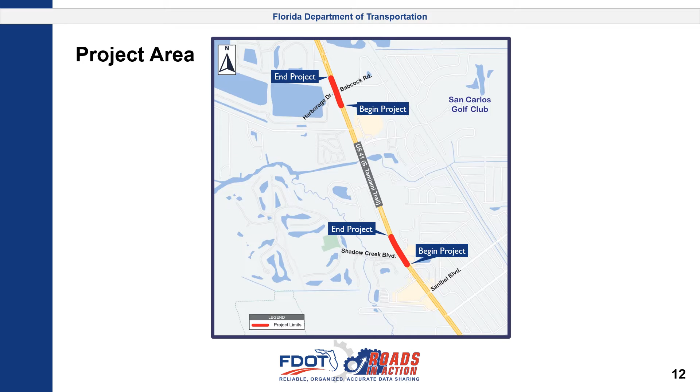Slide 13. The project is intended to increase safety along US 41 by managing access at the intersections of US 41 at Shadow Creek Boulevard and US 41 at Harborage Drive / Babcock Road. Access management is being applied by converting the existing full median access to 2-way directional median access.

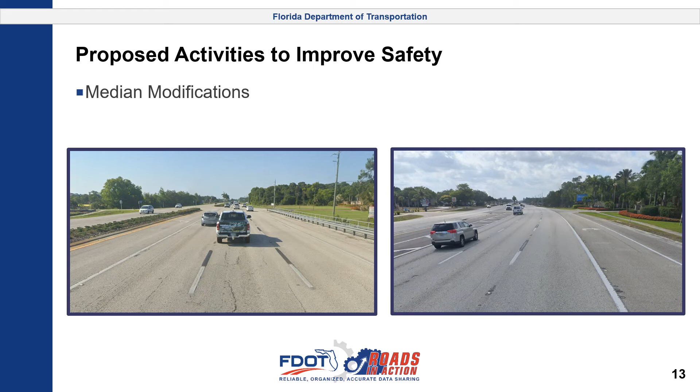Slide 14. One of the most important responsibilities of the Florida Department of Transportation is to ensure that the design of each state road properly balances access and mobility. Increased access supports the mobility of people and goods within a corridor. However, as the number of access opportunities increases, so do the potential interruptions to traffic flow.

Each interruption or conflict point presents a safety concern. Adjusting roadway configurations to maintain property access while limiting the number of conflict points is known as access management. The purpose of access management is to provide access in a manner that preserves the safety and efficiency of the transportation system.

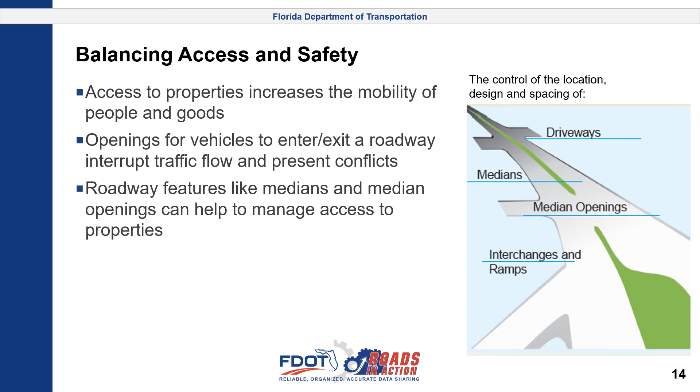Slide 15. Conflict points are areas where vehicle paths legally cross within an intersection. For example, when one vehicle turns right to enter a roadway, it must merge into the path of vehicles that were already heading straight on that roadway. This requires vehicles traveling in different directions and at different speeds to share the same space. Crashes are most likely to occur at these conflict points.

This graphic illustrates how the number of conflict points changes based upon converting a full median access to a 2-way directional median access. The 2-way directional median access reduces the number of conflict points by reducing the through and left turn movements from side streets. These side street movements are redirected to turn right onto the main roadway, followed by a U-turn at an adjacent median opening. This is called a restricted crossing U-turn.

With a restricted crossing U-turn, drivers stopped at the side street waiting to cross or turn left no longer must navigate a complex intersection with two directions of traffic, often traveling at high speeds. The restricted crossing U-turn results in a 54% reduction in injury and fatal crashes.

Slide 16. This project proposes converting full median openings at two locations to two-way directional median openings. A full median opening allows left turns for vehicles from each intersection approach along the main roadway and side streets. Turning vehicles would maneuver in a shared space with many conflict points within the median opening.

A two-way directional median opening is configured so that only vehicles traveling along the main roadway can access it to make a turn. Left turn and through movements from side streets are removed. On a north-south main roadway, there would be one directional opening for northbound left and U-turning traffic, and a separate directional opening for southbound left and U-turning traffic.

This configuration has fewer conflict points and provides improved visibility by managing the placement of vehicles within the median.

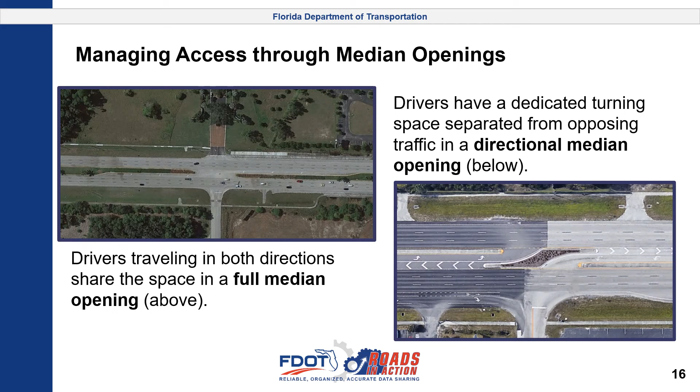Slide 17. This table compares the number of fatal/incapacitating and total crashes at Shadow Creek Boulevard and Harborage Drive/Babcock Road from the years 2015 to the present under current and proposed conditions. By eliminating left turn movements onto US 41, a 28% reduction in crashes at Shadow Creek Boulevard and a 25% reduction in crashes at Harborage Drive/Babcock Road is expected.

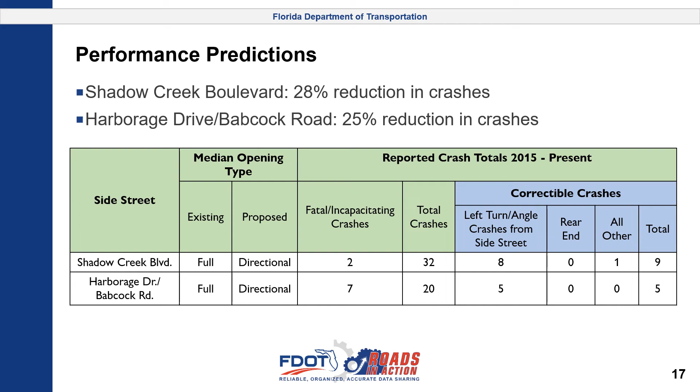Slide 18. To reduce crashes and increase safety, the full median opening on US 41 at Shadow Creek Boulevard will become a two-way directional median opening. This modification is expected to reduce the number of crashes at the intersection by 28%.

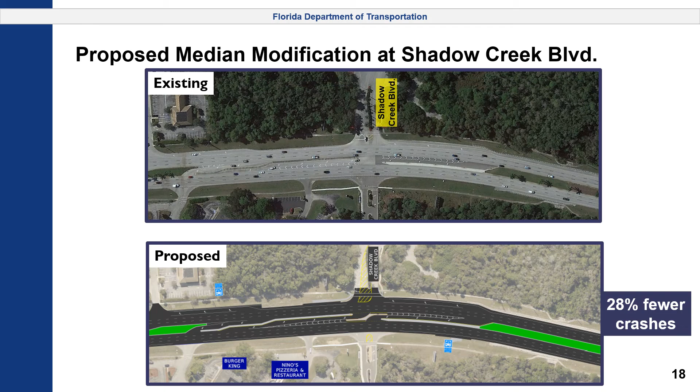Slide 19. Drivers accessing US 41 from Shadow Creek Boulevard will no longer have the option to turn left to enter northbound US 41 or travel through onto Trifecta Lane. Instead, they will turn right onto southbound US 41 and proceed to the directional median opening at the San Carlos Plaza, which is approximately 550 feet from the Shadow Creek Boulevard intersection. This maneuver is expected to add approximately 39 seconds of travel time for some commuters wishing to head northbound.

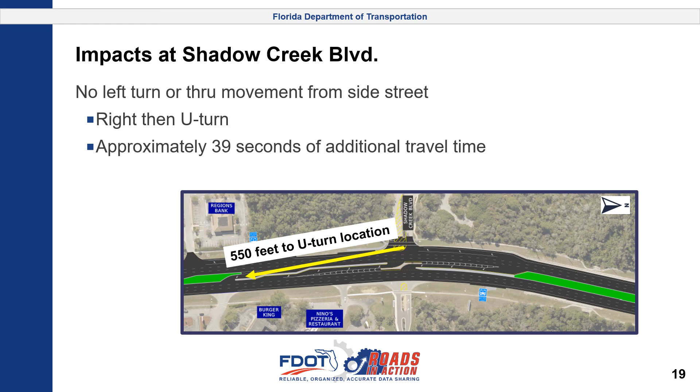Slide 20. To reduce crashes and increase safety, the full median opening on US 41 at Harborage Drive/Babcock Road will become a two-way directional median opening. This modification is expected to reduce the number of crashes at the intersection by 25%.

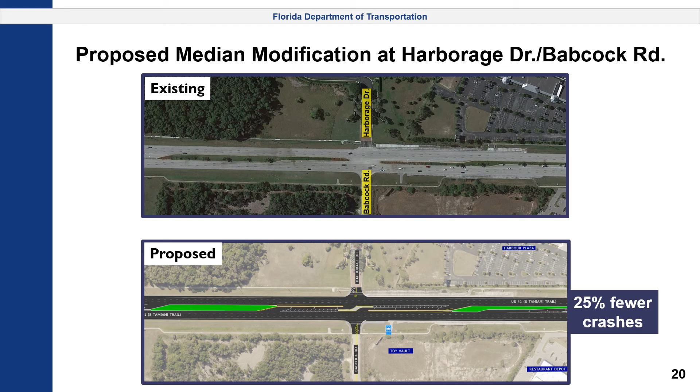Slide 21. Drivers accessing US 41 from Harborage Drive will no longer have the option to turn left to enter northbound US 41 or travel through onto Babcock Road. Instead, they will turn right onto southbound US 41 and proceed to the directional median opening just before Park Road and the San Carlos Marketplace, which is approximately 1,214 feet from the Harborage Drive intersection. This maneuver is expected to add approximately 58 seconds of travel time for some commuters wishing to head northbound.

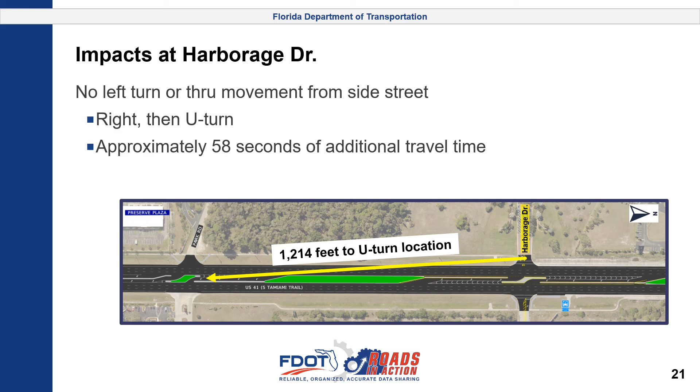Slide 22. Drivers accessing US 41 from Babcock Road will no longer have the option to turn left to enter southbound US 41 or travel through onto Harborage Drive. Instead, they will turn right onto northbound US 41 and proceed to the directional median opening at Restaurant Depot and the Harbour Plaza, which is approximately 1,014 feet from the Babcock Road intersection. This maneuver is expected to add approximately 52 seconds of travel time for some commuters wishing to head southbound.

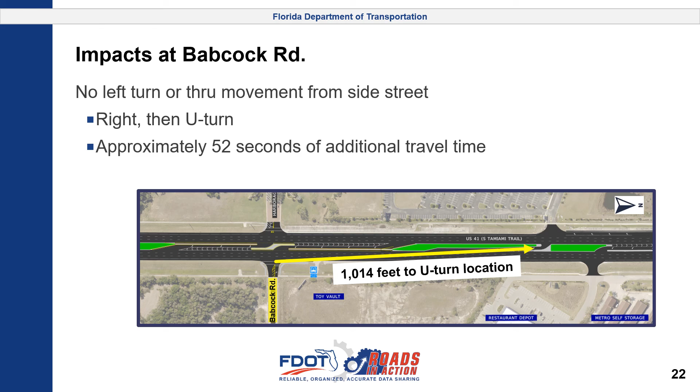Slide 23. Design of the access management changes began in December of 2021. Plans are anticipated to be complete in April of 2023, with the construction start date to be determined. It is anticipated that construction will take approximately 4 months to complete.

The estimated construction cost is $734,081. The department is looking to construct this project as soon as funding becomes available. If the project cannot be funded by the completion of the design, an intermediate solution will be constructed within the next 2 years.

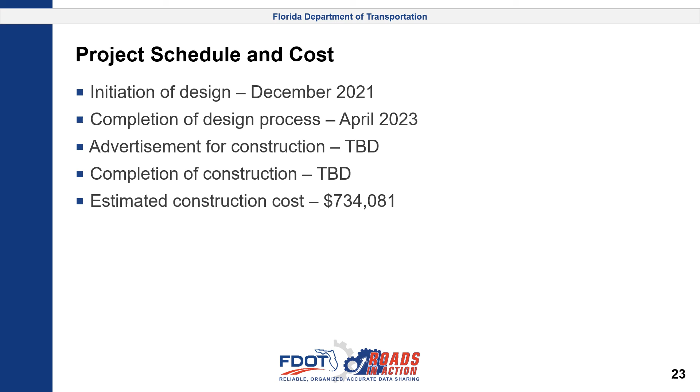Slide 24. Before we conclude tonight's presentation, we would like to share this safety message. The Florida Department of Transportation shares the National Traffic Safety Vision Toward Zero Deaths and has a statewide plan focused on eliminating fatalities and reducing serious injuries on public roads.

Florida's Lane Departure and Intersection Coalition, Impaired Driving Coalition, Pedestrian and Bicycle Safety Coalition, Occupant Protection Coalition, Motorcycle Safety Coalition, Safe Mobility for Life Coalition, Teen Safe Driving Coalition, Distracted Driving Coalition, Work Zone Safety Coalition, and Traffic Records Coordination Committee would like to take this opportunity to remind you to please drive safely and obey all traffic laws. Thank you.